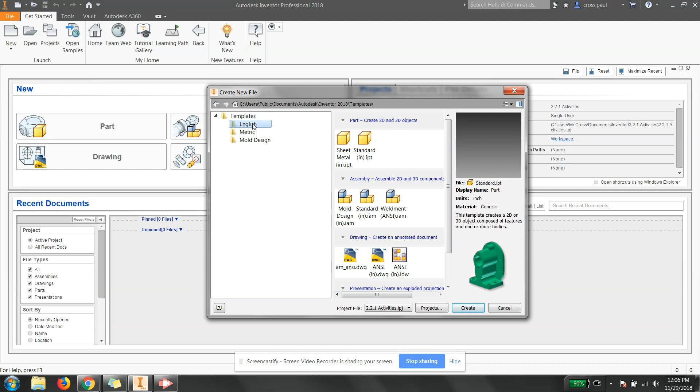Now projects 2.2.1 activities is highlighted over here. What I want to do is say new part, or I can choose new, and I want to make sure I'm in English, standard inch, create.

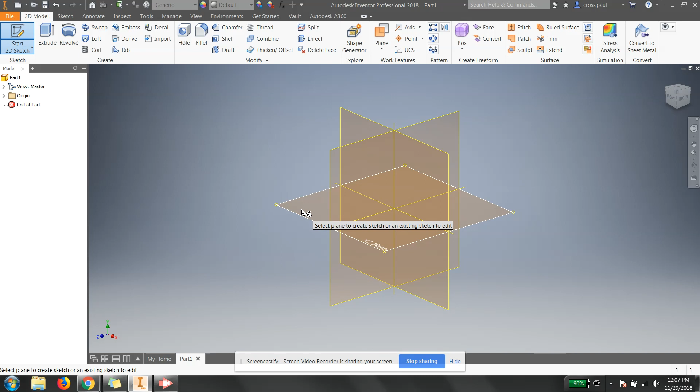It should open up a page that looks like this. So with your mouse, I'm going to right click and say new sketch. This should arrive, and I'm going to choose the XZ plane. Now I've come to this where I have a yellow dot in the center, which is my origin.

I'm going to choose circle, and I'm going to left click. I'm going to drag my mouse out, and it's asking for the diameter. So we wrote that down today, and that was, I think, 0.4275. Enter.

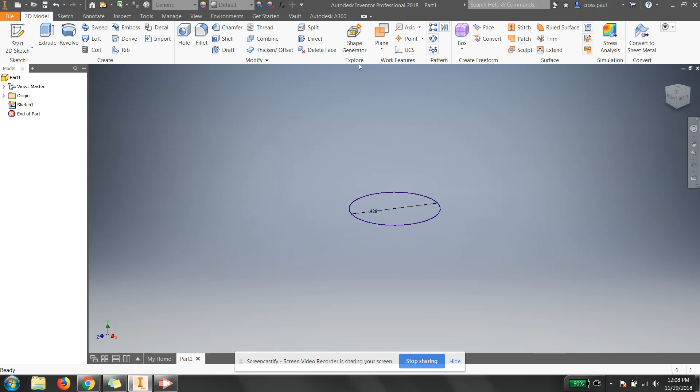Next, I'm going to hit finish sketch. I'm going to use the extrude tool to make this into a 3D object, and this height was 0.25. If you don't remember what you just did, over here on the left is my browser page, and so there was my sketch, there's my extrusion.

Next, I'm going to right click on this top of my surface, and I'm going to say new sketch. Generally, I go to project or project geometry, and I'll select my object that I just created, and a yellow line shows up. Next, I'm going to choose the point tool, and I'll pick the origin where the green dot appeared. I'll again say finish sketch.

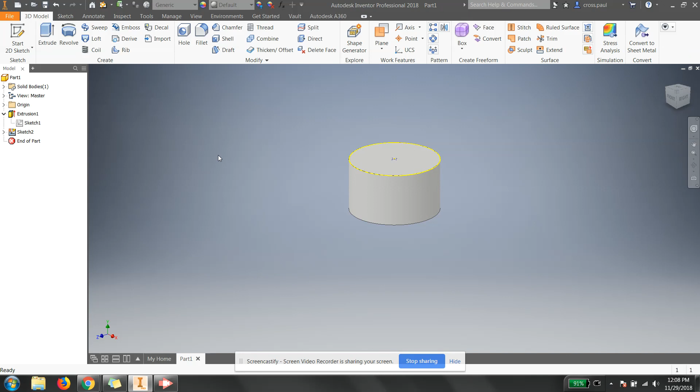I'm going to put a hole through that point, and so I need to put 0.1625 as the diameter of the hole.

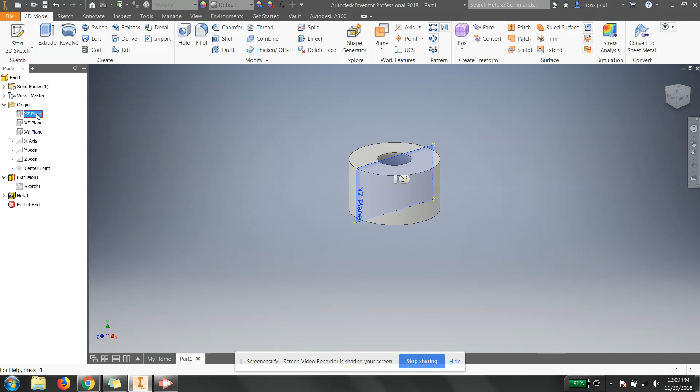And now lastly, I'm going to go to the origin folder, and I'm going to look for either the YZ plane or the XY plane. Either one of these is fine. I'm going to go ahead and right click on the YZ plane, and go new sketch.

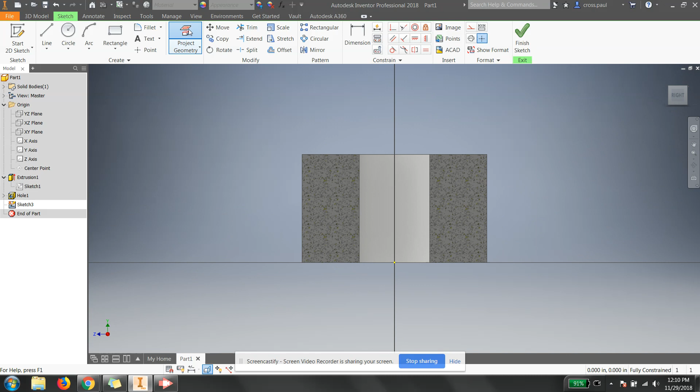Next, I'm going to hit F7, which is on this computer function F7, to slice my graphics. I'm going to choose Project Geometry, and I'm going to select this entire object, and I'll select the cylinder that's left.

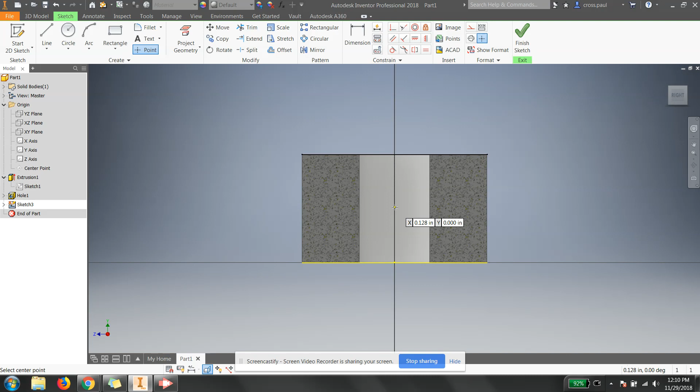And then I'm going to choose Point, and if I go to the middle, it has a green dot show up. If I go down to the middle here, it doesn't want to catch. And I'll project those geometry components as well. So my midpoint shows up as green.

There's a line snapped over from the middle. I can confirm this by adding a dimension: 0.125, that is half of 0.25. So I know that that is correct, so I'll finish the sketch.

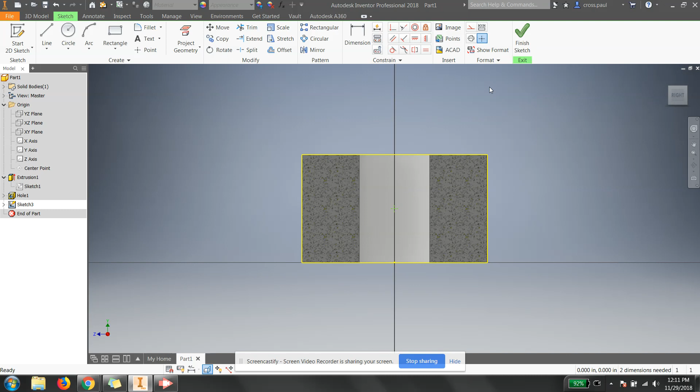And now I'm going to choose hole again, and I'll go to a top view. So now the hole is cutting through there, but what I want to choose is a tapped hole for threads. It's a number 8-32. It automatically defaulted to that. And I can say OK.

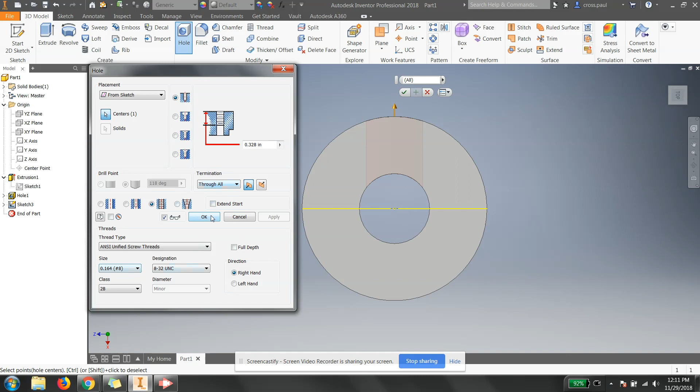So if I look at this, there's my part. That is the steps to creating our collar. So lastly, I'm going to go File, Save As. It's saving it in 2.2.1 activities, and I'm going to call this a lock collar.

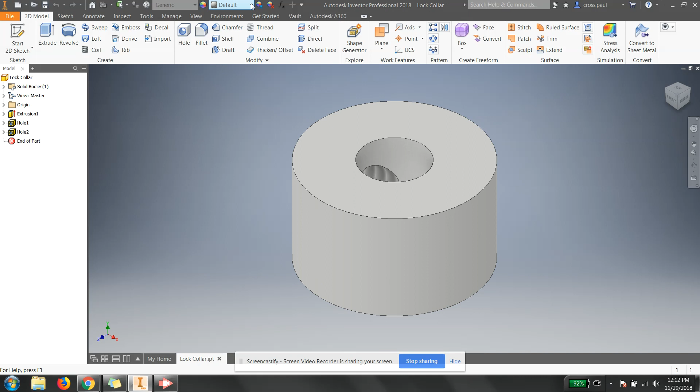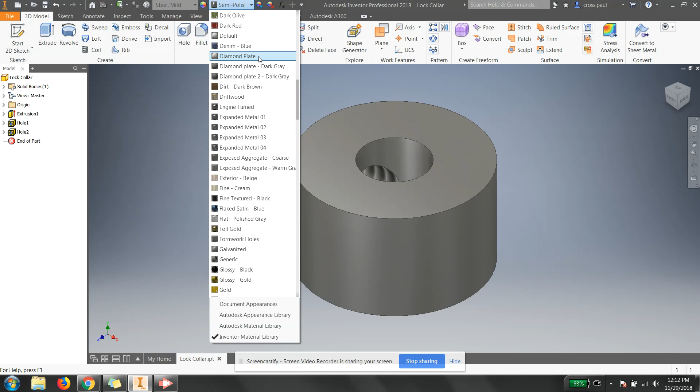And lastly, I'm going to change my material to mild steel, with, we can go with a chrome finish. And I'll save it again. There is your lock collar.